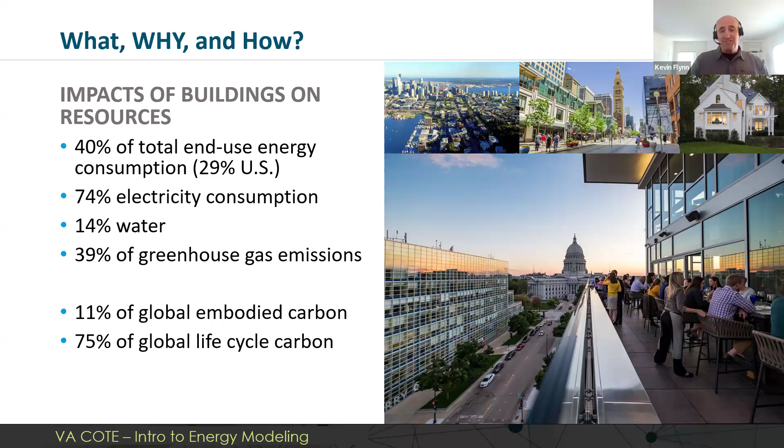Buildings are responsible for 40% of total end-use energy consumption, 29% in the US, 74% of electricity consumption, 14% of water. We emit 39% of greenhouse gas emissions on our planet directly attributed to our buildings, and 11% of global embodied carbon and 75% of global life cycle carbon. Those are big numbers, and it's in our best interest and responsibility to try and improve them. It's a race to zero.

We're trying to get there. Part of how we can get there is early in design, and I mean from the very beginning of thinking about design, to begin to look for ways to reduce our energy consumption, our fossil fuel use, our water use, and still provide beneficial places for people to live and work.

The important part is to start early, to use a framework. For those of you who don't have one, we really want to work as an integrative, interdisciplinary team. Using the AIA framework for design excellence is a great starting point—it at least helps frame discussions around all of these issues.

We also want to establish a baseline energy use intensity for our buildings, so we have a goal, and then set goals to reduce against that baseline, working across disciplines, measuring our performance, and never letting the minimum become the maximum to which we aspire.

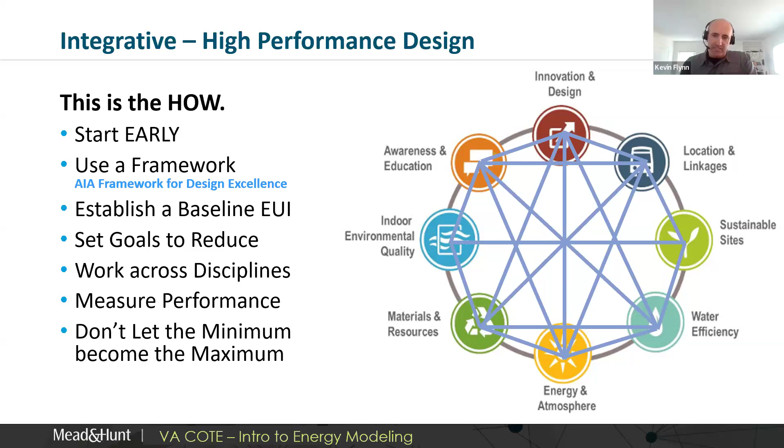Design starts early. Even in site analyses, we're making decisions that impact our energy use.

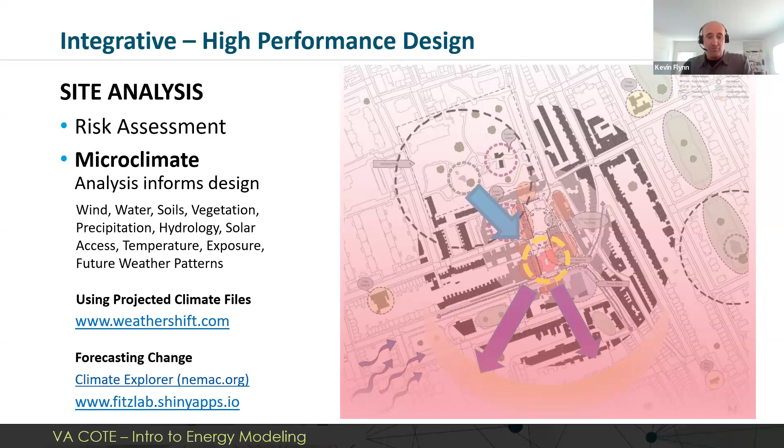Views, understanding the site is important—where winds come from, the soils, the vegetation, hydrology, solar exposure. Future weather patterns are important too, because right now when we model our buildings, we often use outdated climate data from 20 or 30 years ago. We know that climate is changing, and it will be very different in 40 and 60 years. We've been seeing this happening already, at unprecedented rates. So I encourage everyone to start thinking about what's going to happen in the future rather than what has already happened in the past.

Mickey, if you'd like to chime in. I can jump in here.

So this is a tool that was actually developed at University of Maryland's climate program. And just to give you an idea of the relative importance of evaluating the right weather file or the right climate for your building, what it means now and what it's going to mean in the future. I think we could share a link to this so you can play around and see what this means in the different areas or climates that you work.

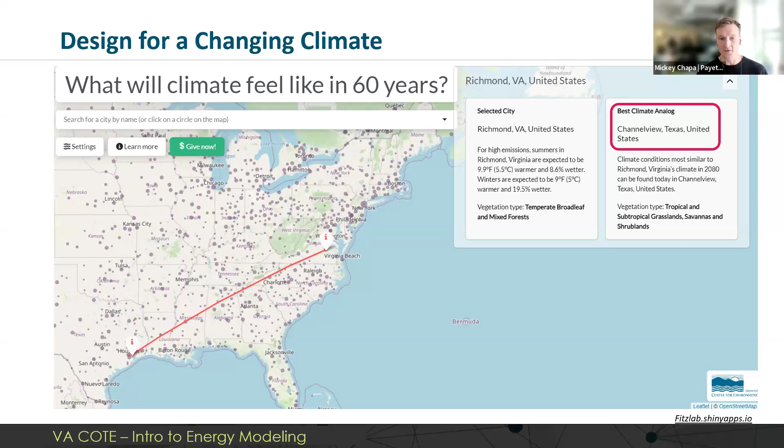We're seeing here that the climate of Virginia may start to look more like Texas, more like Louisiana. And what does that mean for our assemblies? What does that mean for our building systems? If we're designing our projects for 50, 60, 100-year lifespans, the influences on those buildings are going to change in that period.

This is another tool, just to gain some familiarity, depending on where we all come from in our background with energy modeling. If you're starting from scratch, as Kevin mentioned, one of the things we begin with is just looking at a climate file. So this is one tool for looking at the data that comes along inside of a climate file - this CBE Clima Tool. You can look at different wind analyses, psychrometric charts from all over the country, all over the world even. And this is available for free.

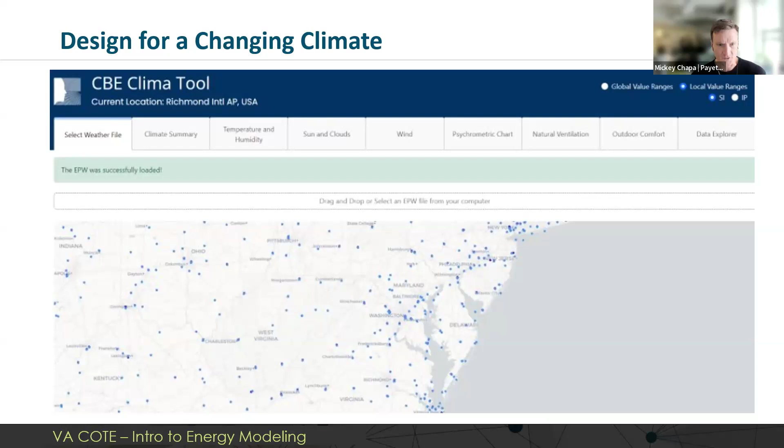We'll talk a little bit about some tools that are around for everyone to use, but this is a great way to get in and start to look at what's going on in the environment, the immediate environment around your project site.

We start every project by doing an intense site analysis. As we chatted about earlier, we really want to understand the site, and it's critical for everyone, especially if you are used to working in the same climate zone, to begin to understand the parameters of that site and how it's changing, and what's going on locally. That's the most important condition we want to look at - what's really happening within that microclimate of each climate zone, city, and place.

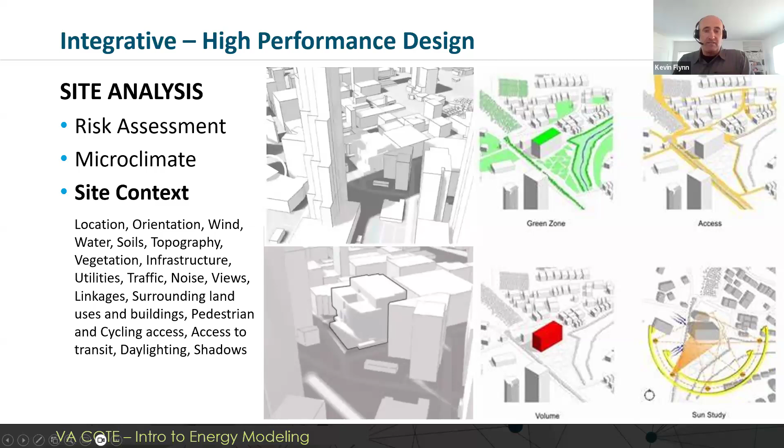We also do a lot of significant risk analysis around climate change, because, as we said, the site we have today will not be the same site in 40 years. It's going to get warmer and hotter. There might be other risks, such as utility grids failing, movement of people and population, and how that impacts our design. But we believe that everything must start from the site and help impact our design decisions there.

It's really important to get started modeling early, meaning at concept or programming or even budgeting, and being heavier in design during concept design and schematic design - very front-end loading - so that we can use energy modeling as a design tool rather than just a prescriptive way to check the box.

And then, Mickey, I know you've suggested that it continues to happen during design development and construction documents, and even into construction administration. If you want to share a few words there, otherwise I'll move on.

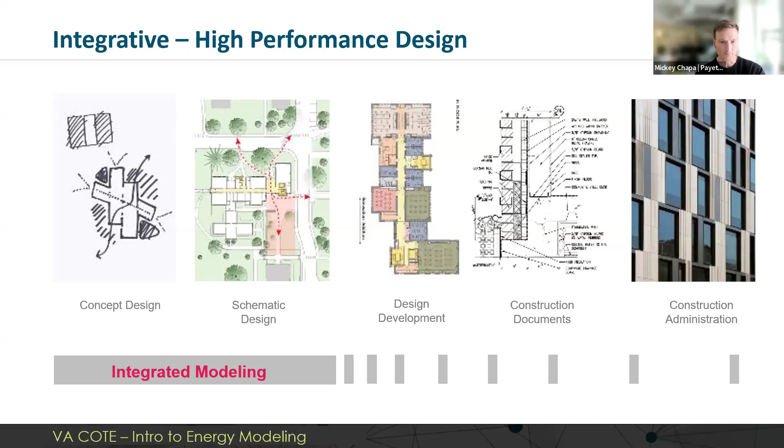Part of our exploration and use of these tools is that we have the most impact at the beginning of the project, but then there are certain check-in points that are required. Say if you're doing a LEED energy model where you need to be demonstrating some improvements during schematic design or at the end of design development, and have a report and documentation along the way. Then through construction documents and CA, you may be using it for verification or confirmation to various interest groups - cities, permitting, any other reasons.

So, wouldn't mind if I just chime in, Kevin. I would say energy modeling not only can be used during design and construction, but it's even useful post occupancy. You can have a model that calibrates to your building and run what-if scenarios so that you can better inform your maintenance, your operations, and your retrofits. So it's truly a tool for the whole life cycle.

That's a very good point. Thank you. And in fact, it's very important to know, because often what we do in design can be greatly impacted by the operational sequences and use of the building. We'll explore that a little bit later, but almost no building operates exactly as the predictive energy model might show. If we have an understanding of the actual operation of the building and the energy use intensity post occupancy, that helps us either go in and take corrective measures to improve that performance, or help us design in the future when we have a better understanding of how buildings are being operated.

Again, we've seen this early on: the design decisions we make have the greatest impact at the lowest cost. As we move through the progression of the project schedule, that reverses. Our ability to impact cost and performance is very important early on, when the cost is least. As the project moves forward, our ability to impact cost and performance decreases significantly, and any choice we make then becomes more expensive generally.

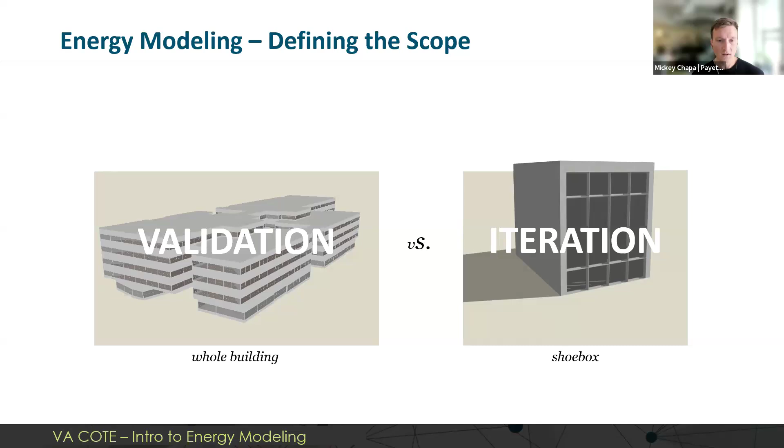This is just a thought about how the energy modeling process works and compares to the design process. We have validation models where we might use the full building to document for LEED credits or for permitting, but there may be better design impacts we can achieve by looking at smaller studies, whether it's just the facade, a specific atrium, an entrance moment, or something else you want to look at, and then refine from there. So there's a different level of entry you can go about looking at these.

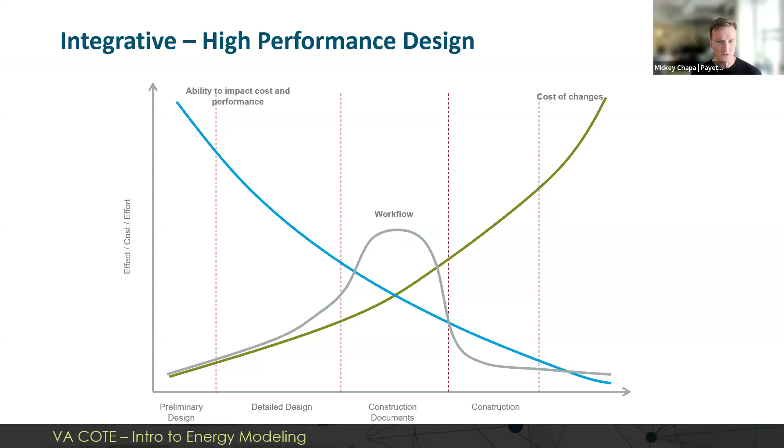Architects are traditionally in charge of the building as a whole and the direction it's going, but we may not always have visibility into the specific systems.

If you've done an energy model before, say with Cove Tool or Sefaira, you've gone in and picked a system, whether it's all-air, VRF, or some other type of system. There's opportunity for conversation within this, and that's the level where you start to have conversations with your engineer, your design team, about the energy model. There's a really interesting space when you can start to look at subcomponents of this and how they influence your design. Like any good design prompt, where there are limits, that's an opportunity for us to get creative and work with larger and larger teams.

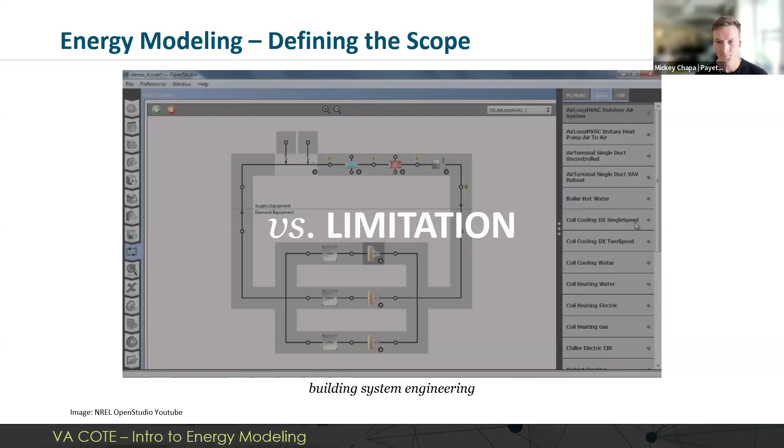One of the components of design that has a great impact on building performance is massing and orientation. Sometimes we don't get to choose that; it's locked in. If we're doing an addition to a building on a tight site, there's only a little bit of room. We get what we get, but we try to make the best of it.

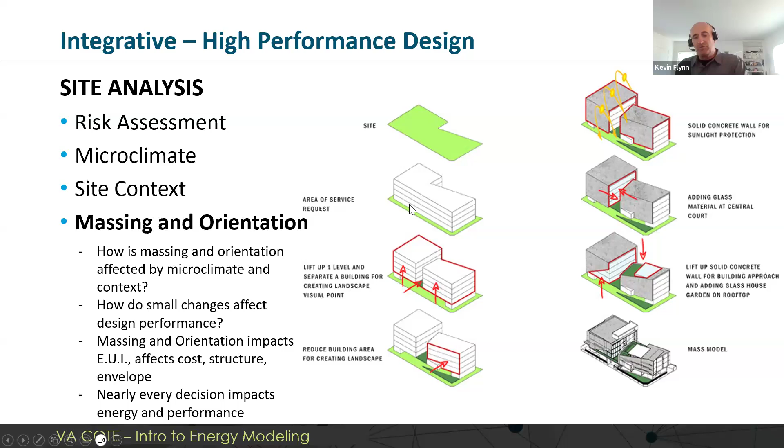When we begin that during design, we can explore different paths and do comparative energy modeling. What's the energy use intensity predicted to be if all my glass is facing south versus west, or if it's a 3-story building rather than a 1-story building? Exploring different massing models with early shoebox, simple box energy modeling makes it a design tool rather than something we just check afterwards, so while we're exploring massing and design elements and features, we can also explore how that impacts our energy use intensity.

We can spin these buildings 57 different ways, but we only get to build it once, unless we're building a bunch of Target stores all over the nation. Generally we're doing one-offs. So we get to explore all the crazy little things we might want to do, and understand how daylighting is affected, how shadows fall across other properties, how the building can shade itself sometimes. Nearly every decision we make impacts energy use and performance at least a little bit, and it's in our best interest to understand what the big moves are versus the little moves.

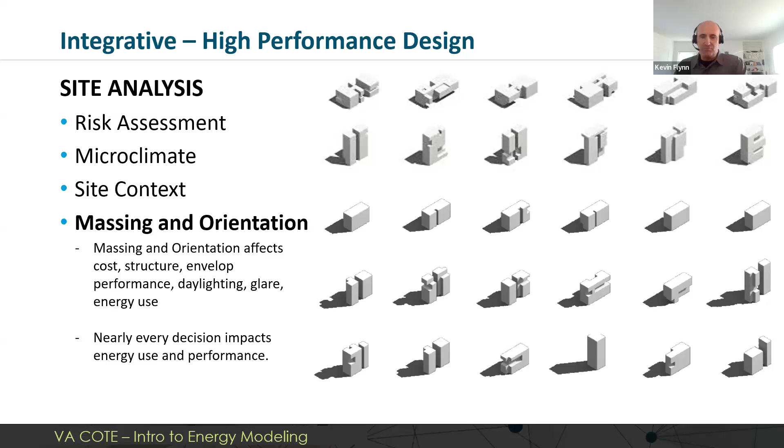But you begin to understand what moves drive energy use intensity, and these are just passive things we're doing. We haven't even talked about building systems yet, or amount of water or air that we're using.

It's really just looking at glazing and transparency, all of the passive things in the envelope, insulation, how much redundancy we're having in our systems. Those things have great impact on our design of buildings. So I encourage everybody to look at passive strategies first, and reducing load through those means before we start trying to power those loads with mechanical systems.

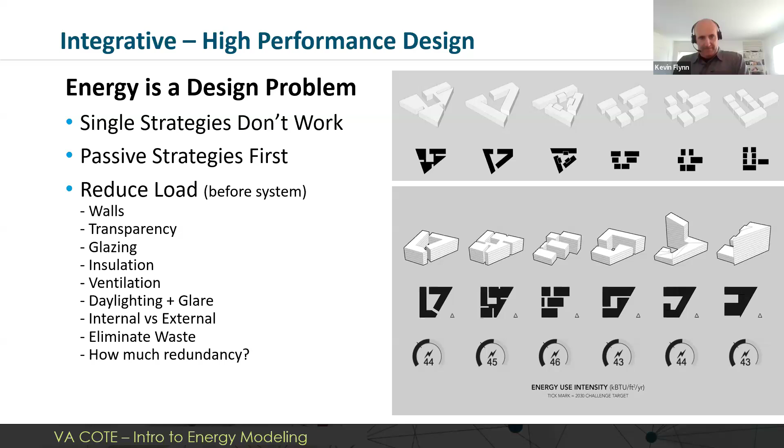Yeah, and another really interesting thing, from the architect's perspective, is that when you're able to input this into your design process, you begin to realize that these decisions you are making are also spatial. Each of the design moves you're taking may have positives and negatives associated with them, depending on the season, depending on your program. Being able to look at those in greater detail starts to generate questions that can influence your design and get people excited about the project.

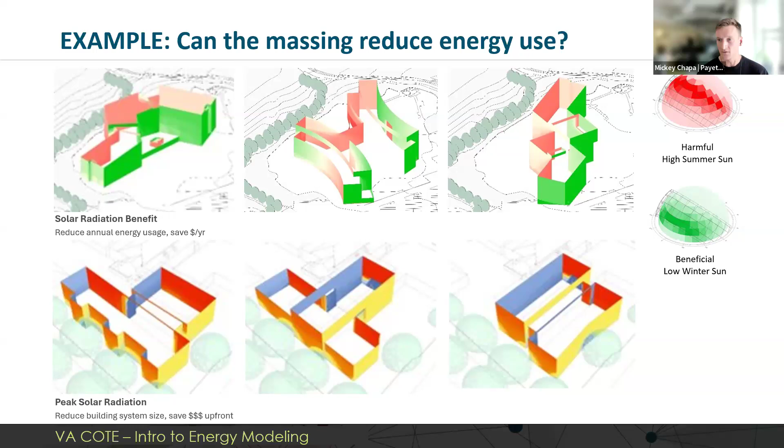I think critical to what we're doing, at least what we're trying to implement at Mead & Hunt, is to make it fundamental to our design process rather than having it be something extra that gets done, a line item that can get crossed off by an owner when talking about scope. We really want it to be inherent and fundamental to our design process, so that it just becomes our de facto way of operating and designing.

And when we get through all of the explorations, we're never quite done. There's always something else that we need to focus on, and then we can begin optimizing the building on the site, and really begin studying how it's behaving on this site, in this town, in this microclimate, in this climate zone, and really optimizing solutions for the building itself.

Again, a couple of these images are from Cove Tool, which we use a lot because we like it. It can do very simple things very early for us, and we generally get within 5% of the more detailed energy analysis that might take weeks and weeks, and we can do it in a few hours and multiple times for our project.

So we like that we get the majority of the decisions made early, and we understand pretty much how it's going to operate. And then when we want further validation, we can do the more intense, detailed energy modeling on building performance.

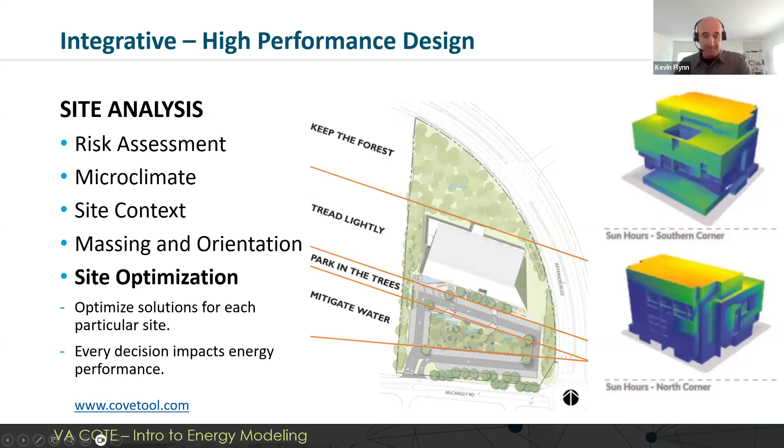Kevin, if you wouldn't mind, that's a great point. I'm using it as a design tool, just to give people an anecdote on what that might actually look like. We were the energy modeler for the Brock Environmental Center in Virginia Beach. Some of you may be familiar with it. It's a net zero building.

And a lot of the decisions that have to be made early are things like how thick are the walls, how thick is the roof. It's very difficult to make structural redesigns and redesign programs to account for thicker walls or heavier roofs anywhere outside of the very earliest part of the design.

So that project had a goal from the outset to be net zero, to produce more energy via on-site renewables than it consumes. And so the question we started asking is, how do these things trade off against photovoltaics? That building has got triple pane, the good German windows.

And it was a lot. It was actually, at the time I'm looking at it, in 2012 dollars, it was 26,235 extra to put in the triple pane windows. But with the energy model, we were able to say that's the equivalent to make that much with photovoltaics.

You need 25 photovoltaic panels, right? And that was actually, at the time, $32,000. So it was actually cheaper to put in triple pane windows. You already have to buy the windows.

It's 26 extra. Why not do that instead of buying more photovoltaics? They've got an R50 roof. It was the same thing there. It was actually twice as expensive to provide the same amount of PV as it was to go from an R30 to an R50 roof.

So these are kind of the questions you can ask, like how do these things trade off against other cost centers in my design? I think comparative cost analysis and life cycle cost analysis is really important, because you're describing doing passive things first to reduce the load, before we worry about how we power them.

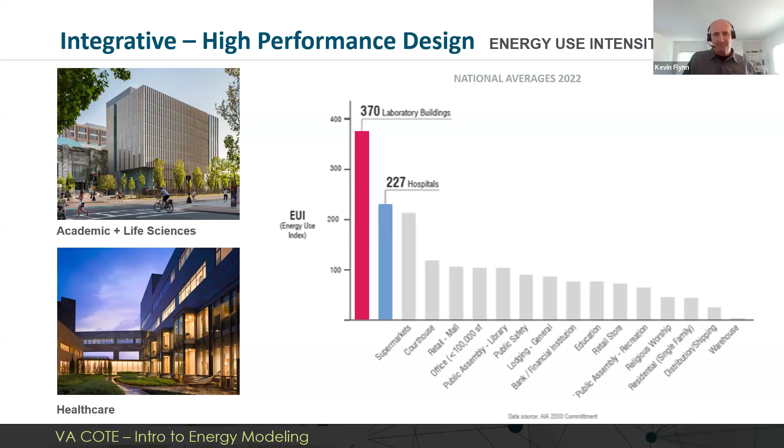We were talking about energy use intensity, and that's the measure. If you haven't heard that term before, it's the amount of energy a building uses in kBTU per square foot per year. So you simply take the total energy use of the building, divide by your square footage, and you get what your energy use intensity is.

Ways that we can benchmark what it should be for a building is, if we're trying to meet the AIA 2030 commitment challenge of getting to zero by 2030, and the amount of reductions we need to do to get there, they're using as their baseline the 2003 Commercial Buildings Energy Consumption Survey, the 2003 CBECS database.

You can find those benchmarks within Zero Tool, which is a free tool. Just type it in, zerotool.org. You can go in and use this tool, and by inputting some very basic information about your building and site, they will give you what the baseline is and what the target number would be to meet the 2030 challenge.

You can also do that in the AIA 2030 DDX, the Digital Data Exchange platform. If you've already signed on to the AIA 2030 commitment and challenge, that tool is free to use. That gets us into the same place. It gives us our baseline energy EUI, our target EUI, and then it shows all sorts of other data along with that. And through the COTE super spreadsheet calculator in their resources section, they give us the same information.

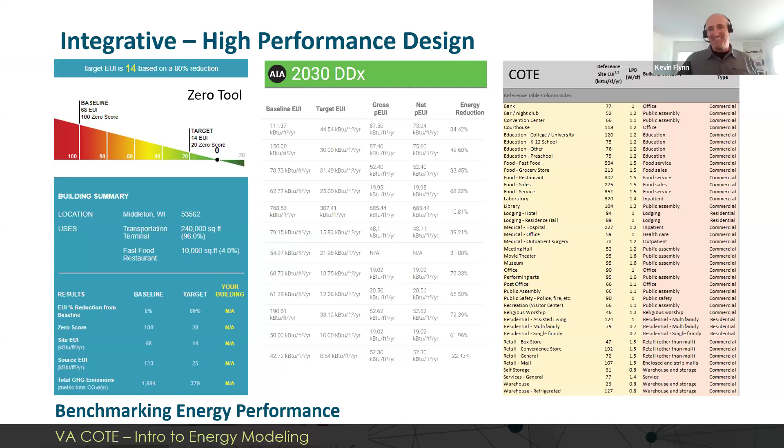Here's a list of a few best practices, because not everybody is going to have access to energy modeling software early on in a building design project. If you can't incorporate it into your firm, as you begin to work on projects, maybe with an outside energy consultant, you're going to be learning things on every project, especially if you work in the same building types and similar climate zone for much of your practice.

Things we've learned that are passive best practices: one, focus on the orientation and glazing, and utilize daylighting harvesting and sun shading, and understand how those things work combined as a system.

Try to limit the amount of glass you're using. All-glass buildings can be really sexy, super fun, beautiful sculptural elements, but they're terrible for energy performance most of the time. So if we can use a window-to-wall area ratio between 30 and 40%, generally that's going to be better.

Eliminating thermal breaks, using continuous insulation - the more insulation we can push to the exterior of the skin, the better. If it can be continuous, it increases our R-value and increases the performance of the stated R-value in a wall assembly. Then using a continuous weather barrier to increase air tightness and making sure gaps are sealed. These are all passive things that contribute to improved energy performance.

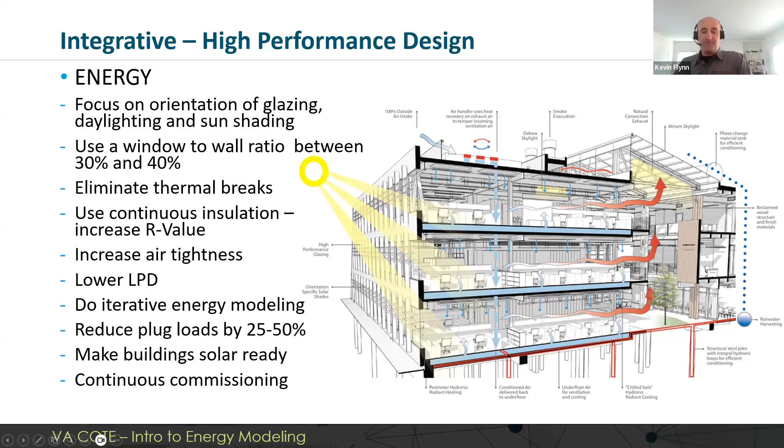Just looking at a few things that have impact in terms of systems on our building, after we've designed our buildings for interconnected systems - mostly, even if it's not intentional, that's what we're doing. The areas of greatest impact: air tightness and glazing area, glazing U-values and factors on the front end - big impacts. Roof insulation, other parts of the building envelope, the solar heat gain coefficients and the glazing, HVAC systems. And then the biggest one of all is occupant behavior and how the buildings are being operated.

Because we can design a building to operate at a certain percentage of savings, and it can be operated in a very different way, so it may not be operated to the levels we had planned for. If we can get utility information on an ongoing basis after occupancy, we learn about how the building's being operated and maybe make some suggestions to the owner about that. If anybody's been to Reagan when it's backed up in a crowd, that's what it's like when a building is operated how it wasn't intended - it's unpleasant.

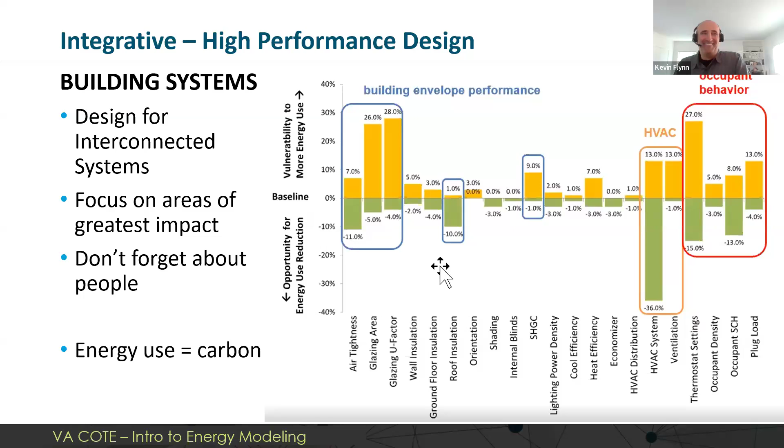And then, also part of energy modeling is really beginning to look at how now we can begin to model different parts and components of the building. So how the structure behaves and what pressure that's putting on our systems. Moisture and humidity, I've talked about this a lot, but optimizing the envelope's really pretty critical and important in our energy use.

And daylighting generally seems to be a starting point to the discussion. Not only does it improve occupant health and behavior and views and indoor environmental quality, but it also impacts energy use. And we use less if we've got more ambient daylight that doesn't bring all of the heat gain that comes with it.

We use less of our building cooling systems. We can use less lighting. We have better health and impact, and it's an entryway and gateway into talking about sustainability and other things that we can do to impact performance and design.

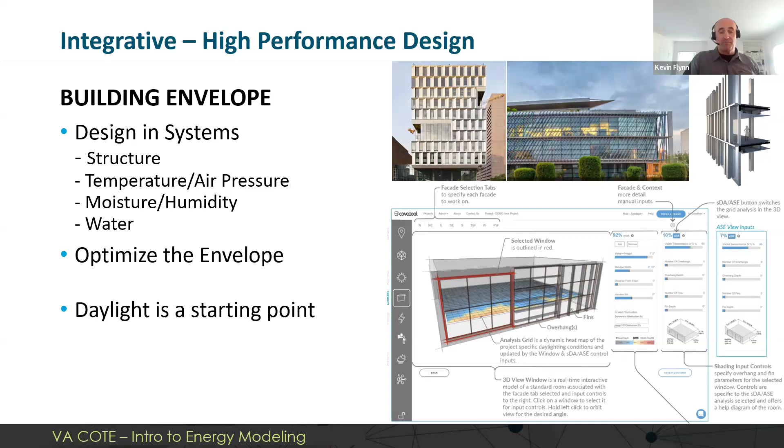So then, as you get more and more comfortable with, say, a given analysis, then you can start looking at the other competing demands, right? So if we're looking at daylighting and views, maybe there's other things that we need to consider. Is it a big window? Are you in a cold climate? Is there a downdraft near the window? What is the relationship between daylighting, energy, and then comfort inside the building for different occupants?

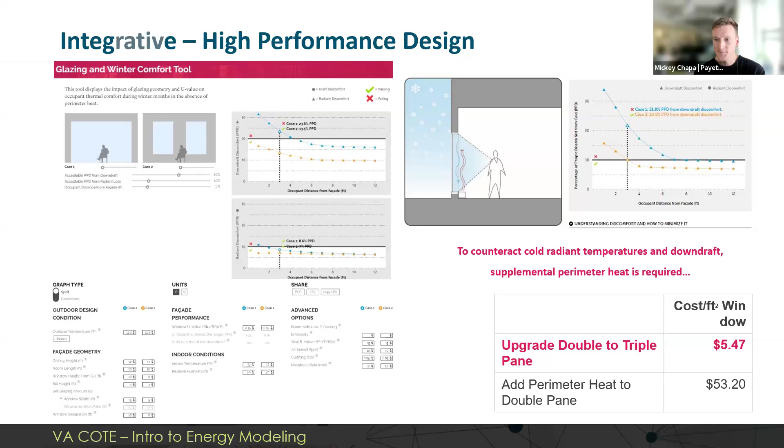So this is another tool, hosted by Payette on our website, and you can use it to compare different glazing assemblies. Again, there are a growing number of free and open source tools to facilitate these discussions with your clients, and even internally with your design decisions that you're making. We have a listing of some of those tools a little bit later in the presentation.

Here's just a very very simple example of what we can do. This is a small regional airport in Merced, California. These images came out of SketchUp and Cove Tool. So this is during concept phase, where we probably had 15 or 16 different options that we were looking at. We had the top 3 faves, of course, and we're only looking at 2 here.

This was done during concept design, where we hadn't picked the structural system yet. We kind of knew what it might be. We hadn't picked any building systems yet. We kind of knew what they might be, but we designed, and we showed this according to what the code minimum requirements would be in terms of a building system.

And from Cove Tool and or Zero Tool, we would have found that the 2030 baseline was an EUI of 91. And just by designing to code, our EUI was a predicted 64.77 - just call it 65. So that's a 29% reduction in energy use just by meeting the code. A competing option, concept 2, slightly different EUI, a 66, pretty darn close to the 65, and that's a 28% reduction.

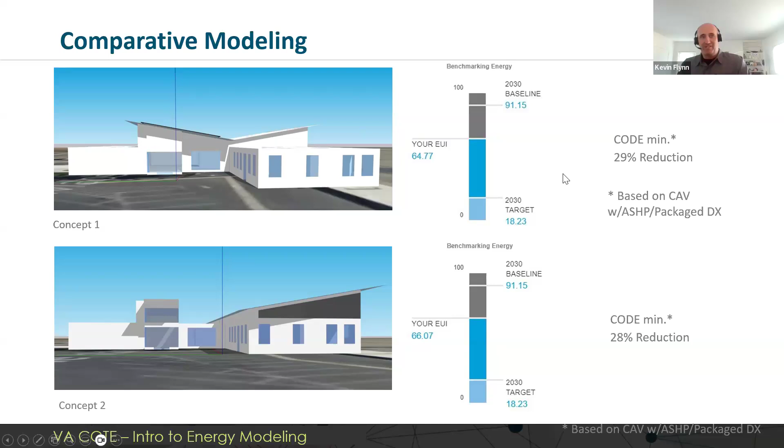Okay, and then as we progressed during design, still during concept, moving closer towards schematic design, we narrowed it down to just a couple, getting a little bit more information, seeing where the major energy use was. And in an airport, the equipment's one of the major energy expenditures. With any passenger boarding bridges or TSA checkpoints and baggage handling, equipment's always a big user.

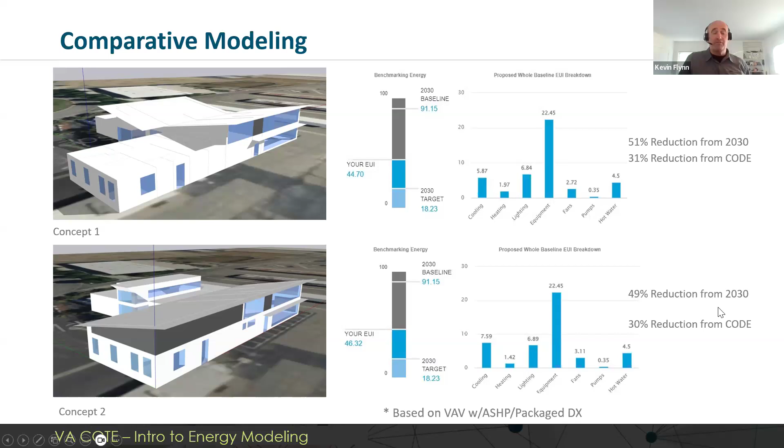But we were able to further reduce, change our mechanical system from a constant volume to a VAV system with an air source heat pump and some package DX cooling. We were able to reduce that to a 51% reduction from the 2030 baseline and 31% reduction from code on concept 1, and 49 and 30% reductions on concept 2.

Well, we moved through schematic design, continuing to do more modeling and more development, and we ended up with a system total that was a 46% reduction over the baseline. So not quite 50 there. We had to make some changes, but this was based on a slightly different mechanical system with a direct outside air system, still with an air source heat pump and a packaged direct expansion.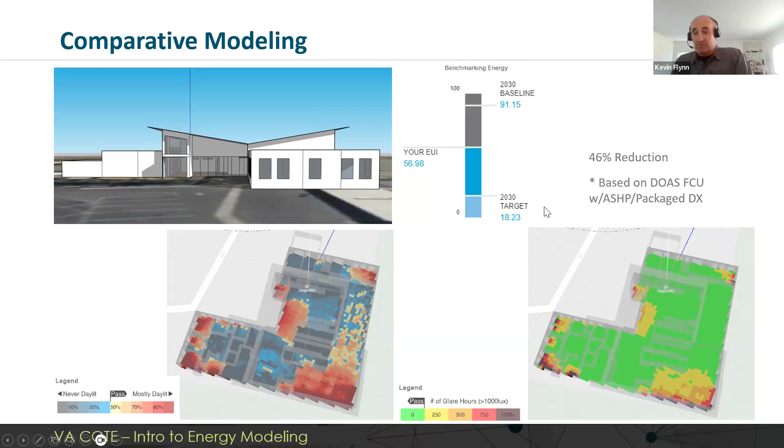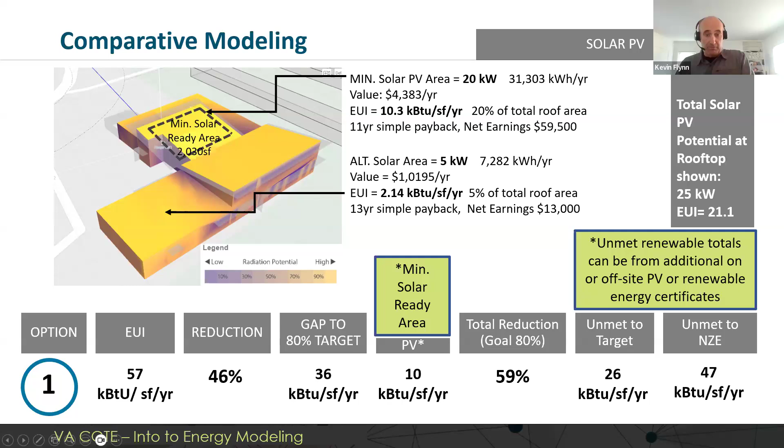Also, on every project, we like to do at least a gap analysis in terms of how to get to zero. Whatever our energy use is, can that be powered on site by PV or some other form of on-site renewables? And so we look at where we have the best solar exposure, what size system could we put there, what impact would it have on the building, and whether or not we can actually afford it, and look at the life cycle cost analysis of that. And so we do this for every project, whether the project can afford it or not, in terms of putting on-site renewables, just so that we have the information moving forward as we try to make our buildings solar ready.

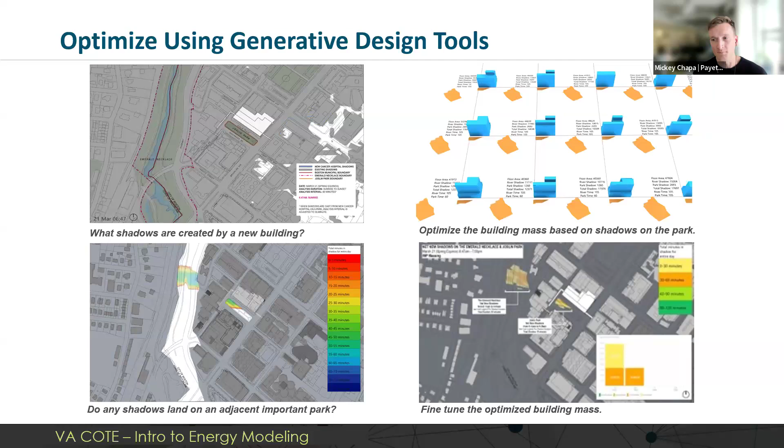This is just a little example of once you've embedded these analyses into your practice, you can scale up with other tools that are available, whether generative design tools or Autodesk's suite that plugs in. We saw some shadow analysis earlier - maybe these could also be optimized and leveraged against your environmental data. The more you do this, the more you can elevate your practice over time.

I know we're probably running short on time, but we still have a little content to get through. Maybe we could flip through this last couple quickly - this is just an example of our process over time, working your way down and tracking. Keep tabs on your projects. The 2030 commitment is a great way to force that in your office every year. If you haven't signed already, definitely encourage everyone to have that conversation.

You can start adding different softwares to your design practice, and we can speak to some of these - this is a suite that we use. Kevin, you mentioned Cove Tool earlier. My office definitely leverages Honeybee and Ladybug as plugins for Rhino. If that's within your practice, that's an easy and free way to really dive deep into different explorations. There's a lot of tools, and many of them are free.

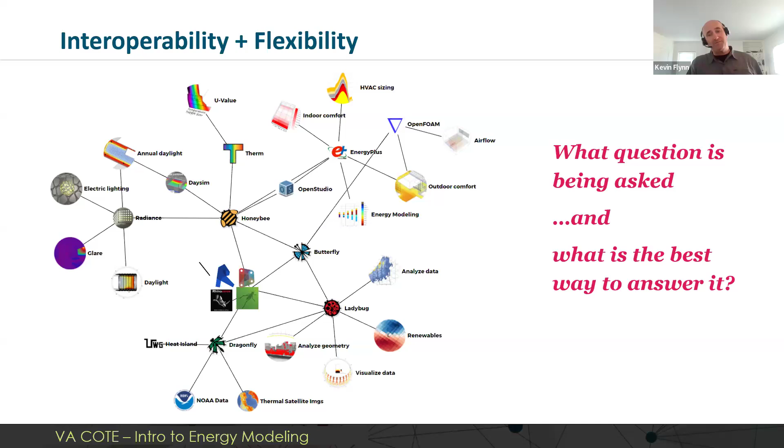Use them, and use the proper tool for the proper analyses. Here's a listing of some free and open source tools. In terms of energy modeling, there's Energy Plus and Open Studio, the DOE2, Honeybee. There's a free WUFI analysis to look at wall assemblies and where dew point might occur within those assemblies - that's important to understand. And Climate Consultant and the CBE ClimaTool, of course.

For daylighting, Honeybee, Light Stanza, and Climate Studio are all great tools. And then assembly analysis through Therm and Window 8.0. I haven't personally used the Opaque 3.0 beta, but Mickey has, and he's got it listed here - that's a simple one for looking at different wall assemblies, different stud configurations and exterior materials based on a limited collection of standard building materials, and that helps you get a U value.

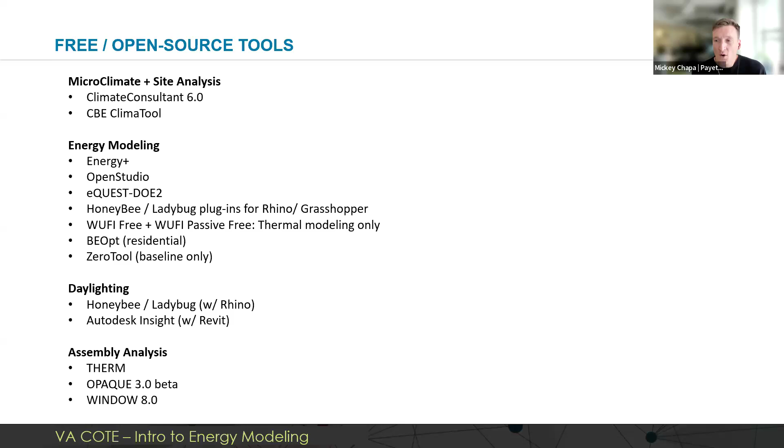Maybe we can move from here into the questions, but one thing is: what are the data points you need to have conversations? Kevin and I are architects, Ajit is an energy modeler and commissioning agent - so what are the pieces? Do we need to have the U value figured out or optimized in a smaller analysis, and then feed that into our whole building energy model and test different variables, like glazing size or any number of other variables?